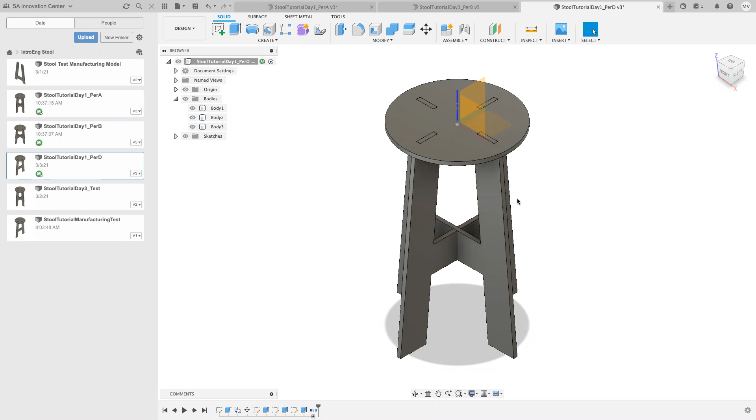All right, so here's our stool. Everybody has this designed. We have all of our dog bones at the corners. They're all in the right places. We're good to go. This is ready for manufacturing.

We're going to be CNCing this, and the way we designed it was with that manufacturing in mind. We call that DFM, design for manufacturing. So all of our parts are exactly the thickness of the plywood we're going to be using, and all of these parts have been set up so that we can literally use our CNC router to cut it out from one direction.

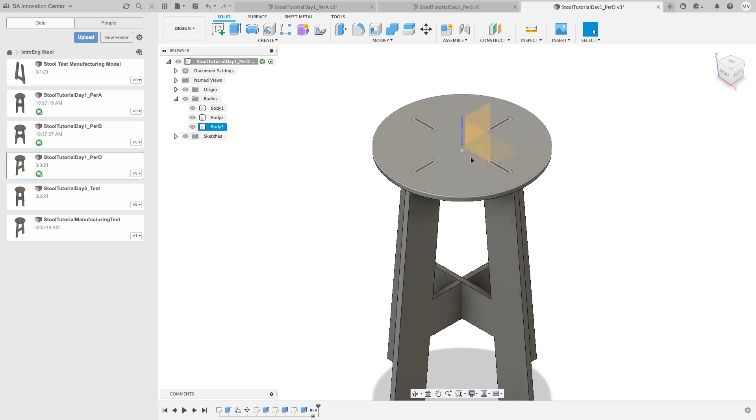We don't have any two-sided machining that we need, but what we do need is to be able to lay all these parts flat on top of the CNC. So as they are right now, the seat we could start cutting out straight from above, but we don't have a machine that could cut the legs from the side. So we need to do a whole setup, okay?

And it's actually called the setup. You'll see it in a second. And we're gonna do that in the manufacturing space. So instead of design, we're gonna go into manufacturing.

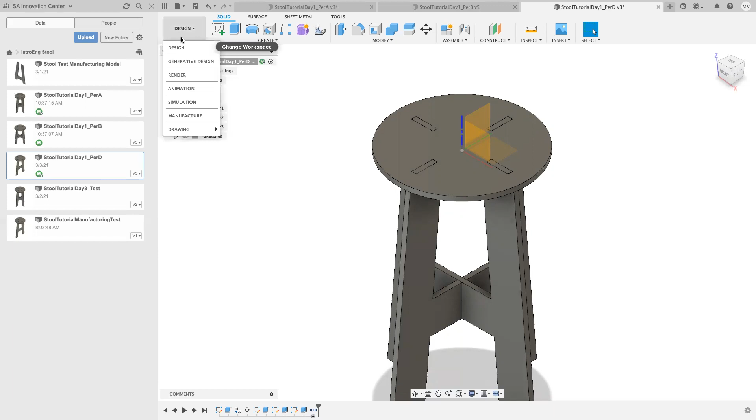It's gonna look like the stool hasn't changed. It's the exact same model that we had before, but all of our tools at the top of the screen have gone away. So now we have these new... let me try and get this out of our way so you guys can see.

Can I move this? There we go. So we have all these new tools along the top, all specifically to how we're gonna cut these parts out and how we're gonna make them.

All of the tools on the screen right now are for milling. Milling means that your cutting bit is spinning and either your cutting bit is moving past your material, your stock, and cutting it away, or there are milling machines where the cutting bit spins in one fixed place and you move your material past it. So you're either moving the cutting bit or moving the material, okay?

There are other options here. Turning is something else. Turning is when you spin your part and the tool sits still. So it's almost exactly the opposite of milling, okay? Turning, you might have heard of a thing called a lathe, right? A lathe spins our parts and we cut them. This is usually for circular parts, right? And so we're not gonna be doing any turning.

Additive, you know what that is. Additive is like our 3D printers. Instead of taking a whole block of material and cutting away to reveal what our part is, we start with nothing and we add on and add on and add on to build up to our part, okay? And then there's a whole bunch of other ones that I'm actually not super familiar with. But like I said, Fusion 360 has tons and tons of features beyond what we're gonna use it for.

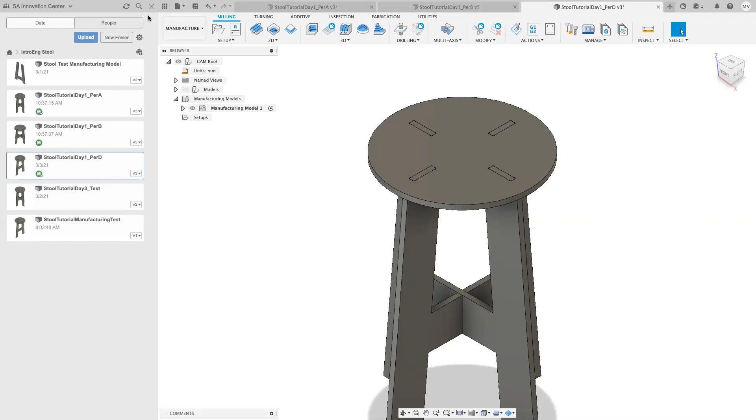And now inside of here, manufacturing model, we still have all of our stuff from our sketch, okay?

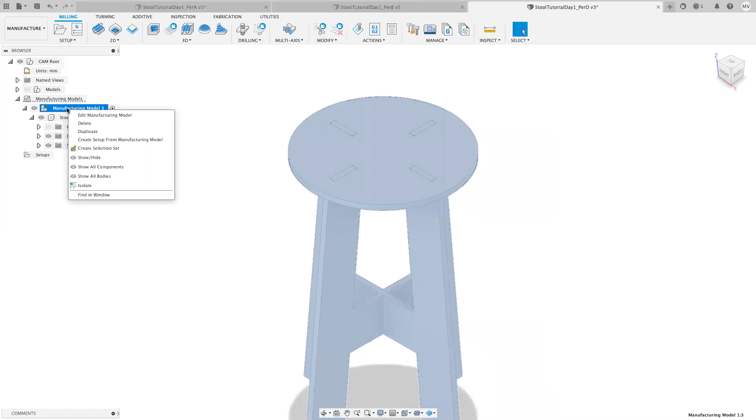Inside the manufacturing model, we need to edit this manufacturing model. We don't just want those parts sitting where they were, we want to edit them and move them around. So we're going to edit manufacturing model.

Now notice everything has changed in the top toolbar. We're still in our manufacturing space, but now we're in our familiar design tools. The first thing we're going to do is create a sketch that defines where we want to lay these things out. I want to put it on the XY plane. You have to make sure you click the XY plane. Some people didn't design their stool with Z being where the seat is, like the stool is kind of laying on its side. Make sure, even if you've done that, you click on the XY plane for this sketch, because that is the cutting surface of our CNC machine. It has its own coordinate system built in: X is left-right, Y is forward-back, and Z is towards the bed and away from the bed.

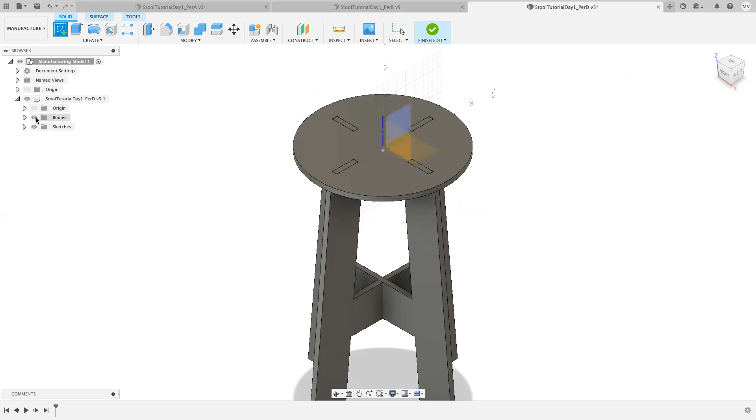So we're going to click on that, and right now I can't actually click on it. Every time I try and click on the XY plane, the seat is selected. So let me hide the body, and now I can actually click on the XY plane, and I'm going to define the area that I want to arrange these.

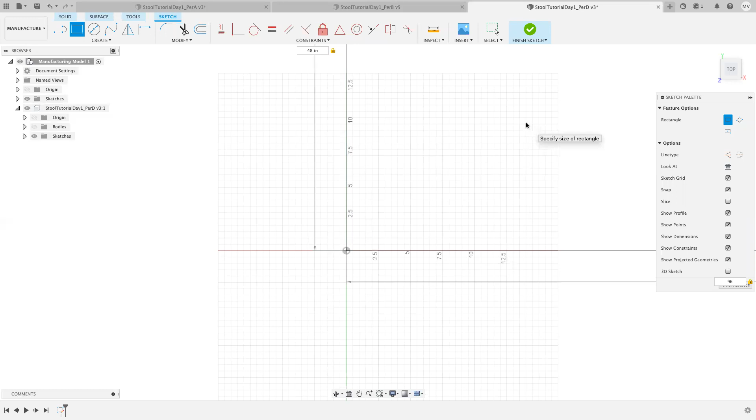For simplicity right now, I'm going to do an area of 4 feet, so 48 inches by 8 feet, 96 inches. That's the size of a sheet of plywood. Our machine can't fit an entire piece of plywood, it's only 2 feet by 3 feet, but there are machines that are this big. I'm doing a large space so you can see how multiple parts can be arranged next to each other.

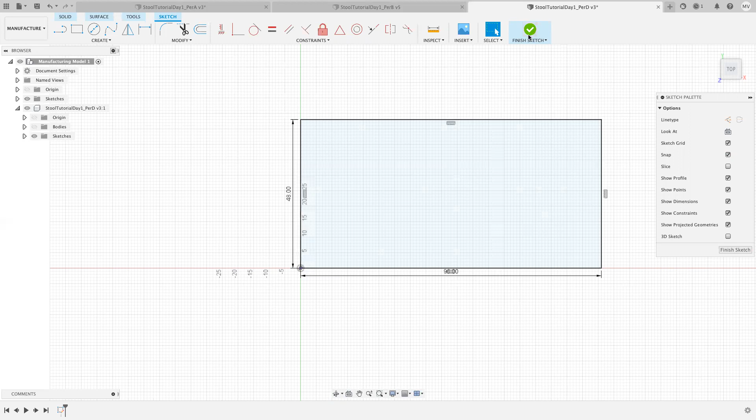That's it, that's all I need, and I can finish that sketch. I actually don't even need to extrude this to show the thickness of the plywood, I can just leave it as a flat sketch.

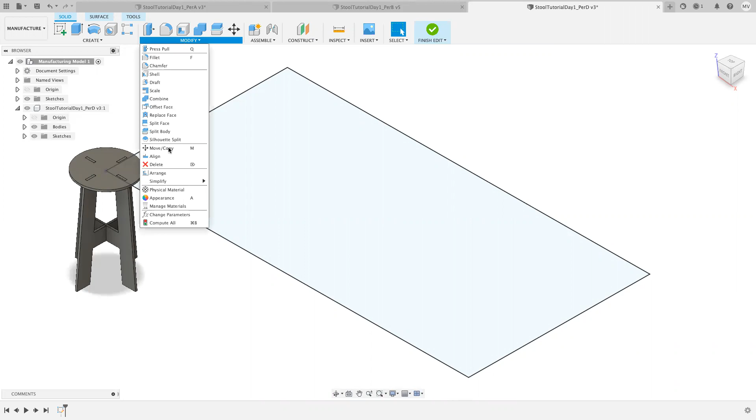If I bring my bodies back in, now all I want to do is put each part laying flat on this sketch. To do that, we go into Modify and click Arrange. We got this set of options, and I will first select the plane of that work area that I'm going to deal with. So there it is, one selected.

Mr. Varney, where's Modify? On the top toolbar, you see these icons, underneath it says Modify. This is where you have a whole bunch of additional features. So Modify, and then Arrange. Oh okay, thank you.

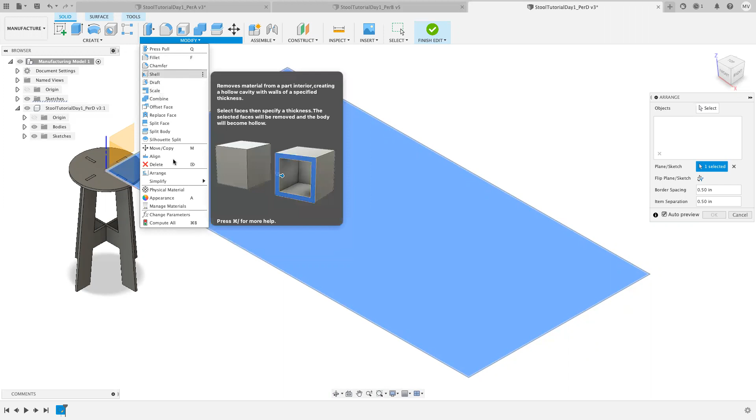Now we want to choose what objects we're going to lay out here. So let's start with the seat, there it is. And then it moved it. Now I want to pick one of the legs also. Wait a second, why did the seat move?

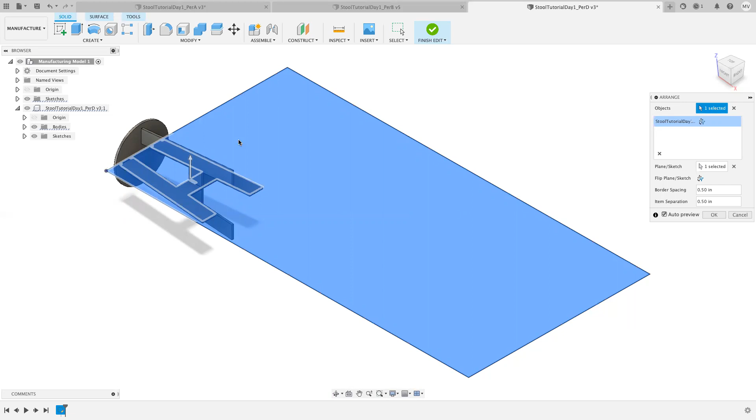It's all attached because when we originally did these designs, we defined the seat itself by a vertical sketch of the legs, and then we put another sketch perpendicular to that. So they're all intertwined right now, because they're still bodies. Let's cancel this, we don't actually want to do this yet. I hit cancel, it puts it back.

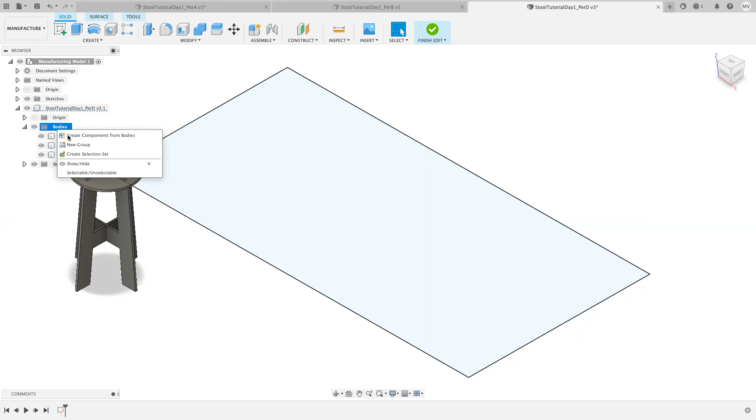I'm going to go to my bodies. I have 3 bodies in here. You can tell they're bodies because they're in the bodies folder, but also there's this little cylinder next to them. If I just right click on that bodies folder, I can say create components. Now notice the bodies folder is gone, and they're still called bodies because that's the name, I never renamed them, but they have this cube instead of a cylinder. That means these are components now.

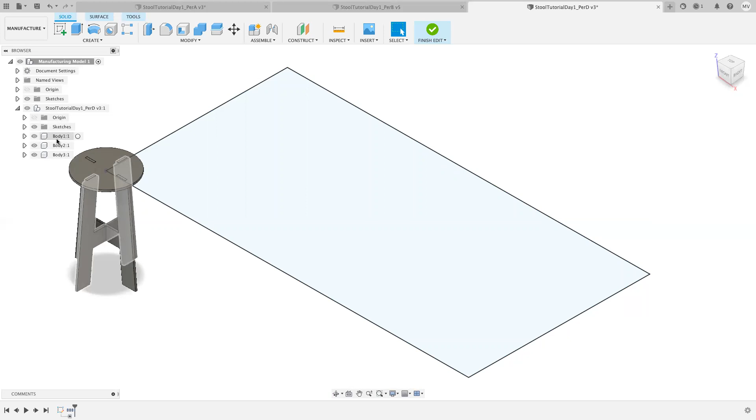They're finished, quote unquote, finished parts. They can be moved independent of one another. All that sketch information is back on our design page where we have the body still intact, but now these are components. If we go through Modify, Arrange again, and we select this plane, now we can select multiple components.

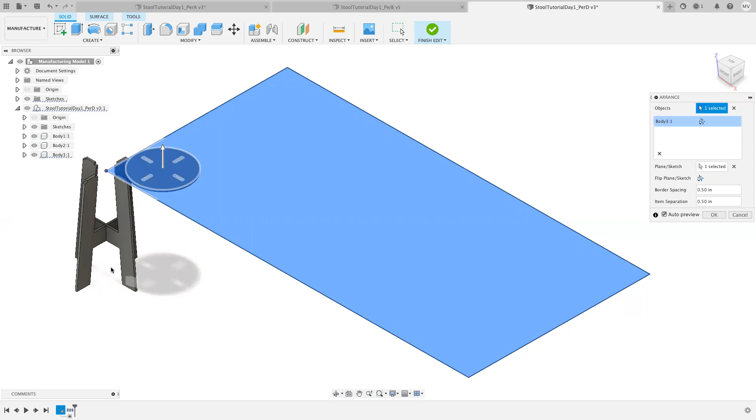So I'm going to click the seat, it will put the seat inside, and notice the legs don't go with it. I can click on one of the legs, it's going to place both of those there, and I'll click the last leg. It arranges all 3 of these things together.

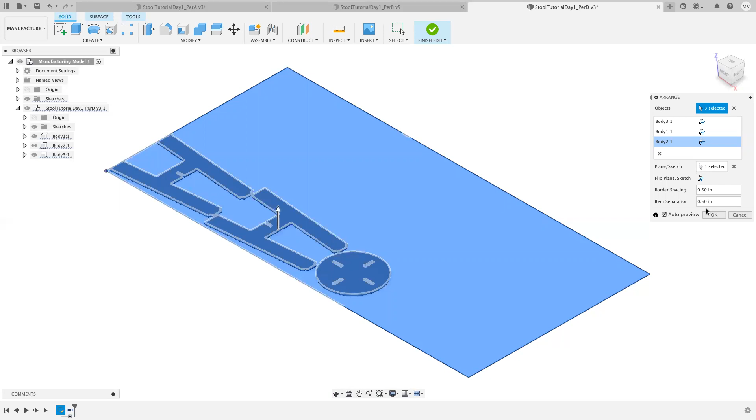They're all relatively spaced out nicely and put into the corner because we're going to try and conserve material and things like that. So one last thing we can check is our border spacing: how far away they'll be from the edge of that sheet of plywood and how much space is between them. I have a 1/2 inch between them because I know I'm going to be using a 1/4 inch cutting bit, about double that size. This way, as you're cutting around one, you don't cut into the other.

So that's it, we're ready to go. These are now laid out flat. But if I go back to my design space, my stool is still fully assembled.

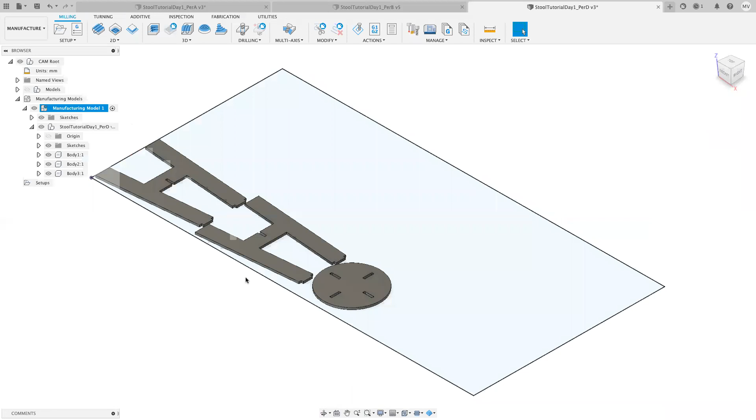Nothing changed. And I can always go back and edit things and change them over here. So let's go back to manufacture. We're all laid out. We're pretty much ready to start.

With our CNC process, we talked about tool paths the other day, and that's basically telling the machine which direction to go and how to cut. But we can't do that until we have what's called a setup. A setup is basically your raw material. Where is your raw material located? And what is the size of this raw material?

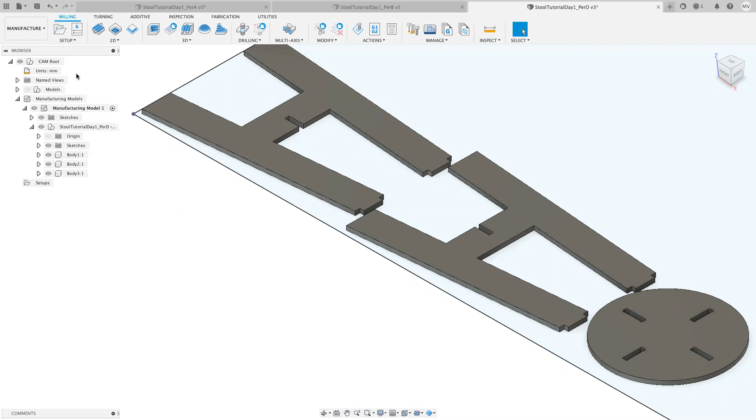So we need to create a new setup. So if I go to setup and then new setup, it kind of tries to define it on its own to start. So basically it's saying, all right, you need a piece of material that's big enough to fit all three of these in it.

Now, we might want to say, all right, let's make this actually the actual size of my 4x8 sheet of plywood. But remember what I told you, our machine can't fit all three of these. We'll have to cut each one individually.

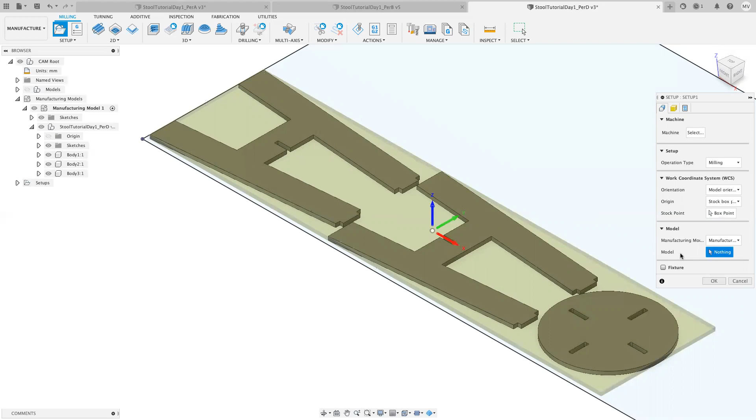So instead of model where it says nothing, it's weird that it says nothing to me. By default, it chooses everything. But I'm going to select something. Instead of nothing, I'm going to select one of these sets of legs. And so now we can see that yellow rectangular prism is defining that piece of material that we will be cutting out.

And we can go to our next, well, a few things. First, I always move my origin. We have to define where 0, 0 is for our machine and for this setup. I'm always going to put it in the bottom left corner. It doesn't have to be.

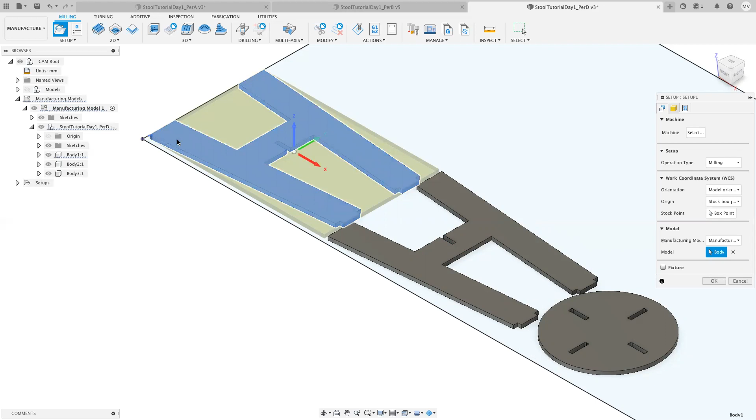But we go to this work coordinate system. We go to box point, and I always click that bottom left corner. This way, if I always do that on every sketch, I know when I go to set up my CNC machine, as long as I have enough room to the right and behind my cutting bit, we'll be in good shape, okay?

I need to tell it what type of stock I have. I always want to leave a little bit of material on the side. It doesn't have to be a small amount. We could have a bigger amount. I'm probably going to put a large piece of wood on here.

But if you put 0 for how much extra material is on the side, it won't think it needs to cut things like the bottom of the legs. Because if you say there's no material there, it'll be like, oh, it's just pressed against that side. I don't need to cut it. So you always want a little bit.

But I'm actually going to say no top material, no top offset. If there was a top offset, the program might think it needs to cut a layer off the top before it gets to the model that we want to come out of this. So we're basically saying no top offset, that our stock, our raw material is exactly the same thickness as the model itself, okay?

And so we're pretty much good. Everything is good to go. This is literally just defining our materials. I'm going to hit okay.

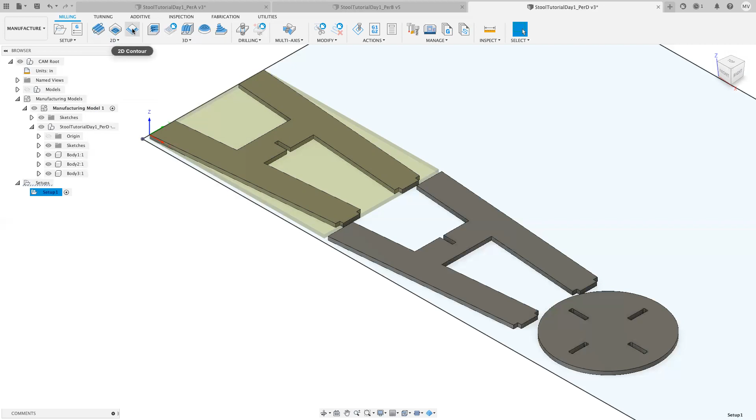The one we need is called 2D contour. It just means cut around my shape, that's all it means. So I'm going to click 2D contour, and then I need to tell it which shape I want to cut around. I'm going to say cut around the bottom edge of my model. You could click the top or the bottom, but I'm going to click the bottom.

Now we get this whole set of options here on the side. It's on the second tab right now because we're choosing geometry. I already selected the shape I want, so I'm going to go back to tools.

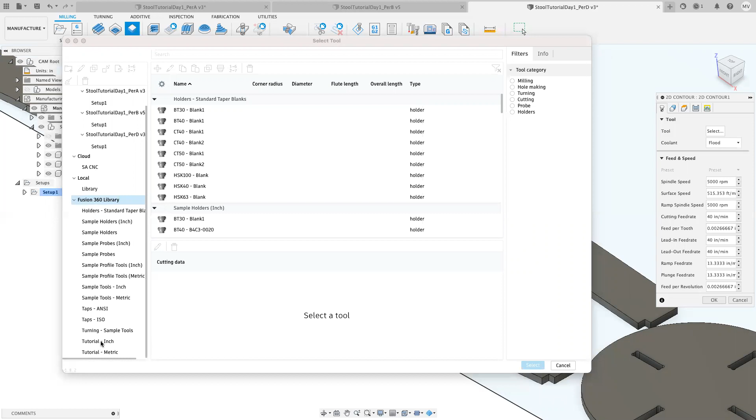Now we need to tell it what is our machine, what are we cutting with. When I go to tool select, I have some ones I've chosen recently, but you might need to go into the Fusion 360 library, where our cutting tools are in inches, and I'm going to go to tutorial inch. There's tons and tons of tools, but I'm looking for milling tools, flat end mills. You can use these filters to find things, and they have a few default flat end mills. We want our quarter inch one.

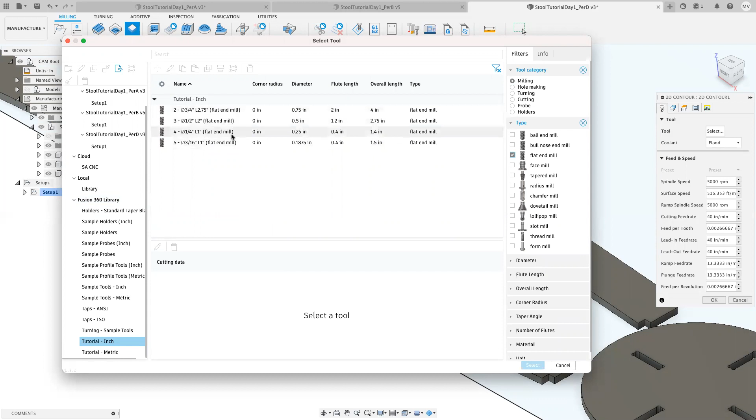So here it is, diameter 0.25, tool number 4 here, and I'm going to load that.

Now, I'm not sure if the first time you do this you'll have a tool holder. That's what this blue thing is, it's the thing that actually holds that end mill. If you don't, we'll find one, we'll get a default one. We can actually measure the tool holder that's on the machine and build it exactly the size and shape it is. The reason you'd want to do that is if you were doing some carving — imagine if you were trying to carve inside a deep pocket, you wouldn't want the thing holding your tool to run into your part. So it needs to know where the machine is so it doesn't crash.

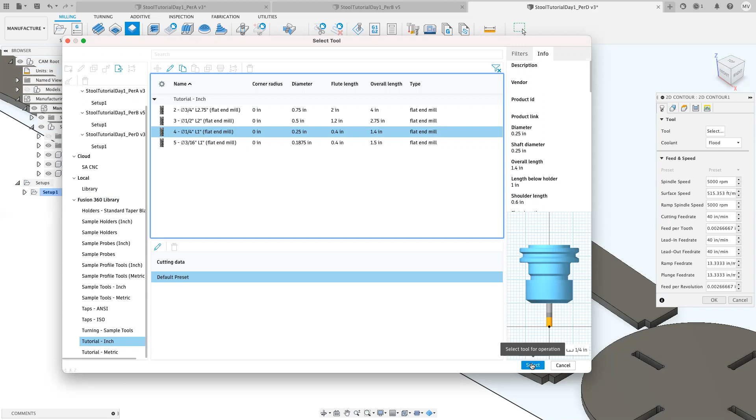And since we're doing a 2D contour, it's not super important. So I'm just going to choose that quarter inch end mill, select it, and if we go over here, we can see it in our picture now. So we're getting closer to finishing this manufacturing.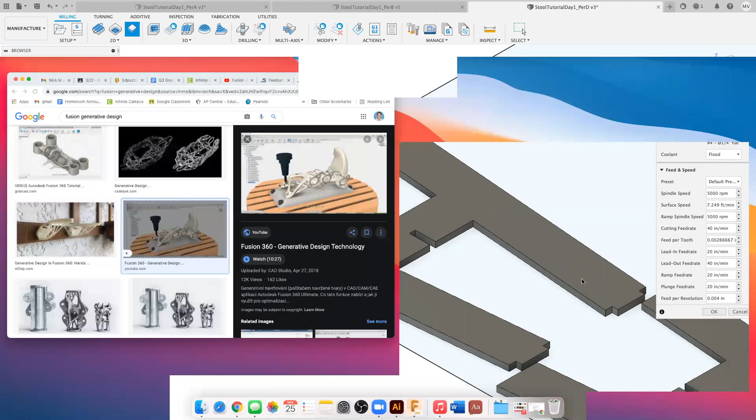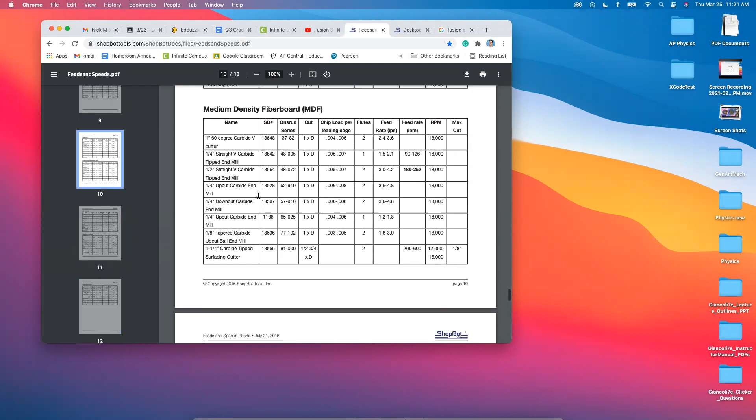Now, feeds and speeds — I'm going to tell you, we'll use defaults. There's a lot to this, but we can actually look up some defaults. Our machine's a ShopBot, and in their manual they have things like soft plywood, laminate plywood, or hardwood, so we can choose some numbers based on parameters they give us. I'm not getting into it, it gets real deep really quick, so let's skip those for now and just leave them as their defaults.

Geometry — so far this looks great. The only problem is, if you cut out a complete shape and remove it from the external piece of plywood that's screwed to the table, what's going to happen? Imagine if you cut out a circle — when you get to the end and finish cutting it out completely, it's no longer full. It won't fall through because it's sitting on something, but it's released from the plywood, and then it would kind of rattle around.

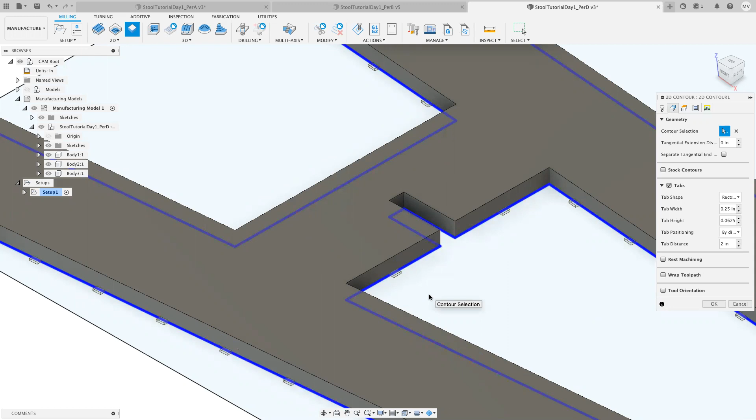So we need to do what's called tabs. If I just click that, you can see there are little rectangles of material that won't get cut — that's basically what it's doing, leaving it attached. There are way too many of them right now, because remember, if they're not cut, who has to cut them? You'll have to manually cut them, then sand them smooth and all that.

So we would change some of these, but let's just leave this to the defaults to see what this is going to look like. The tab height we have here is 0.06 of an inch, so it's really thin. That's usually enough that once you leave those tabs, you can literally break them off by hand.

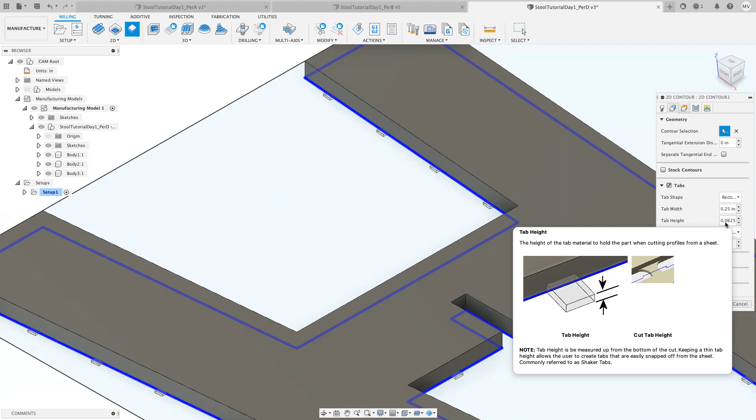So we got our tabs — this thing won't detach from the plywood and rattle around. We can think about heights now. Without getting into every detail of every type of height, when I hover over here it'll tell me what things are. Right now this is the clearance height, and it'll tell me the clearance height is the first height the tool rapids to.

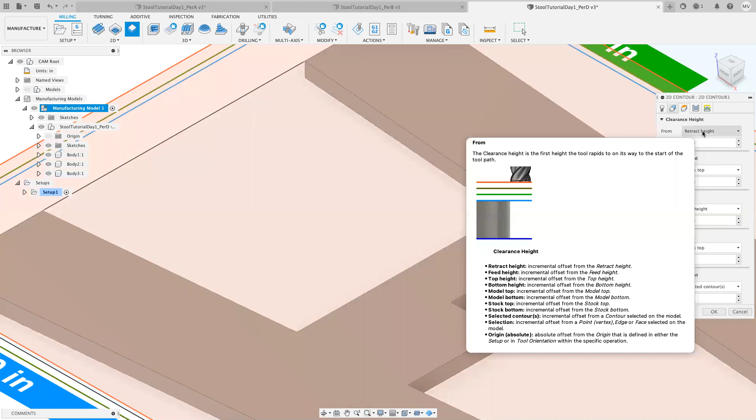Rapid is like high speed movement — there's something defined as rapid movement. And all of these things — retract height, feed height, top height — top height and bottom height are probably the most important. Our top height is basically the top of our model.

Okay, it's the top of our cut - when we expect to start cutting. Our bottom height is the deepest our cuts will go, and right now our bottom height is set to exactly the bottom selected contour. We selected the bottom of our model - that's where we're going to cut to.

The problem is if you leave it exactly there, there's a chance you're just a teeny tiny bit off, and you might leave a thin piece of material uncut. So I want to go below the bottom of my model, a little bit through it, so I know it's completely cut through. I'm going to make this negative 0.05, and now I know I'm cutting through the bottom of that material.

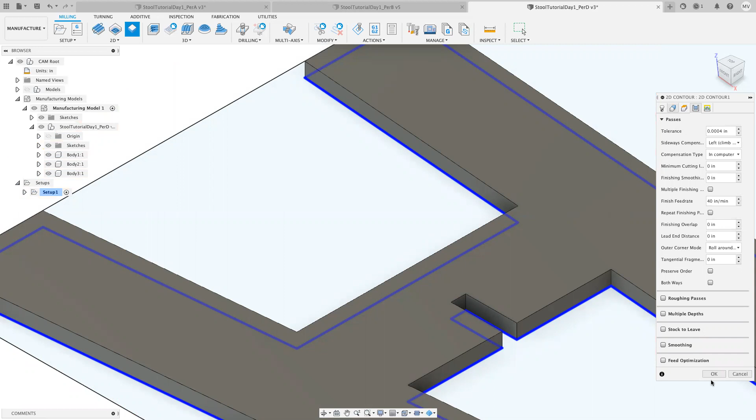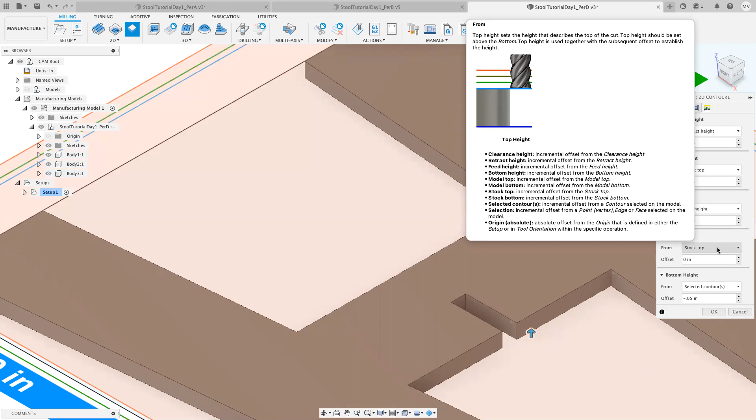Then we can go to things like passes. Let me go back to our heights - for top height, I set stock top. Remember, I already defined the stock top as exactly the height of the model, with the offset set to 0. So that yellow box is exactly the same thickness as my model, which means the stock top is the model height. I've already locked them exactly on top.

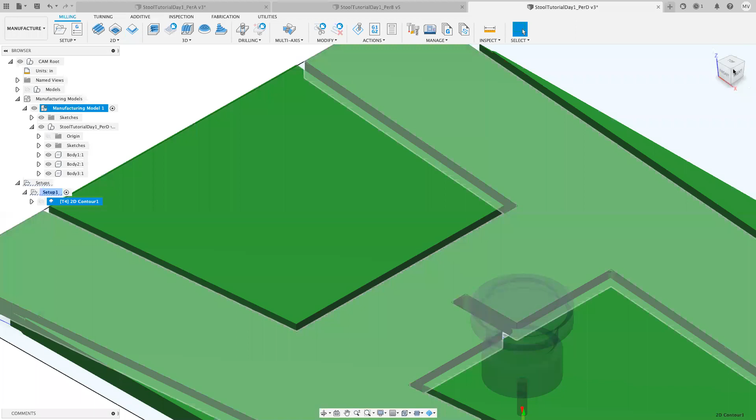So, all finished - I'm going to say done for now. Sometimes I'll finish this so I can see it before going into any settings. If I look, they're showing me the material - the green is the material, and I can see where it's cut through. If I angle it, you can see the tabs that are there. This looks pretty good.

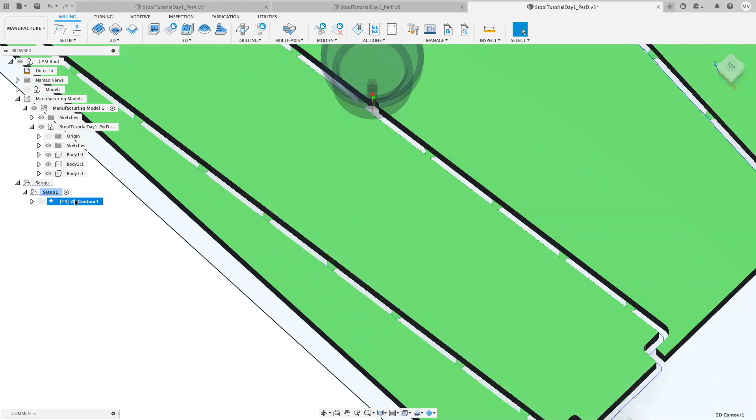I can actually simulate this - let's click on it. If I right click, I get my options and can say simulate. If I zoom out, I can play this and slow it down or speed it up. Okay, and it looks good.

The only problem is that I'm basically cutting all the way through in one single step. I don't really love that. The diameter of the bit is 0.25. Usually you don't want to cut deeper than the diameter of the bit in a single pass. Now, there are ways around that - you can go deeper and cut slower and change feeds and speeds, but as a rule of thumb, the diameter of your bit should be your maximum depth.

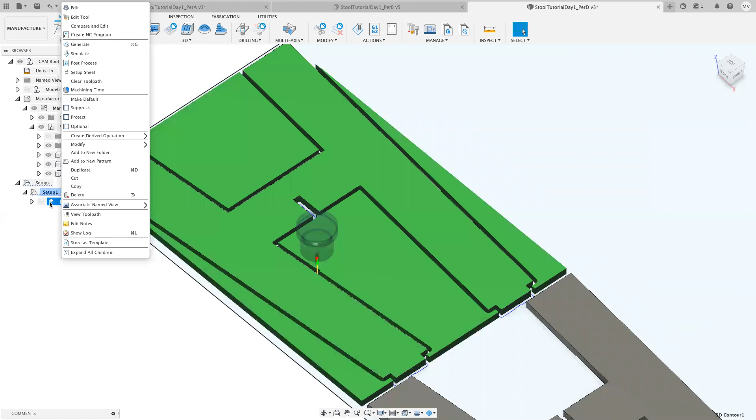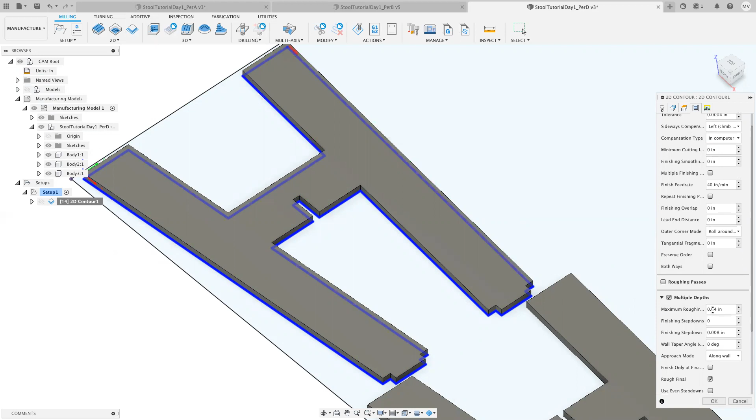So I'm going to close the simulation, go back to this toolpath, and edit it. For passes, I'm going to set this to multiple depths. Now, the maximum roughing depth - roughing just means we don't care about the finish, we don't care what it looks like. Sometimes you'll do a finishing pass, which takes off a tiny thin layer and goes nice and slow to make it look beautiful. That's usually more important for things like metal - for plywood, it's not so important. So I'm going to do all of these cuts in roughing passes.

I allowed it to rough the final, meaning once you go to the very bottom of the hole, you can still be doing all the rough cut settings. I'm going to set maximum cutting depth instead of 0.04 - that's really small - to 0.2. It's not the full diameter; full diameter is 0.25, so a little bit less. I think we're safe. Okay, I'm going to hit OK.

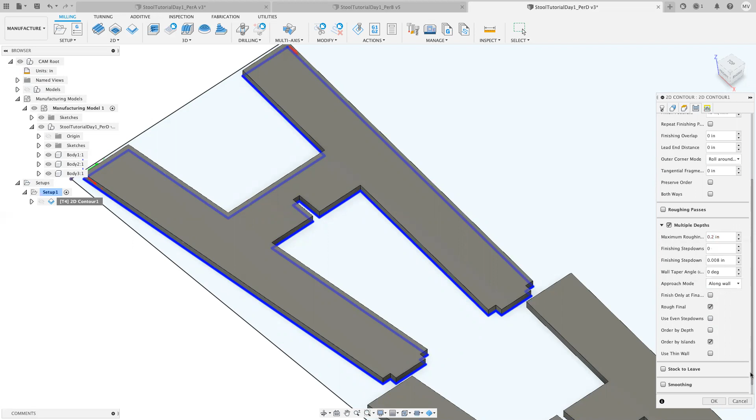And now when I zoom in here, you can see there's multiple - maybe in here you can see it - multiple blue lines. Each one of those blue lines is a pass with the tool.

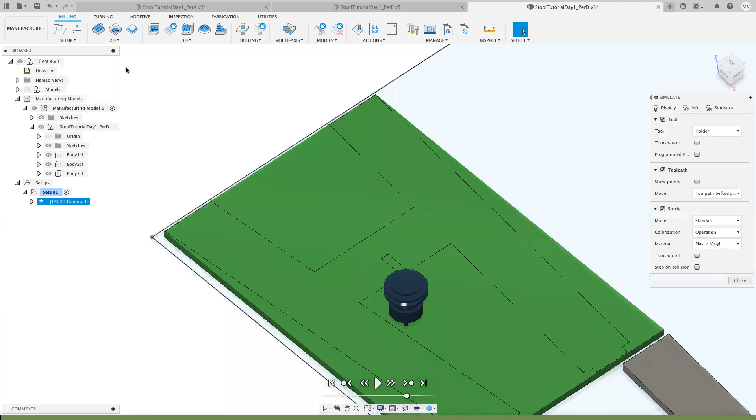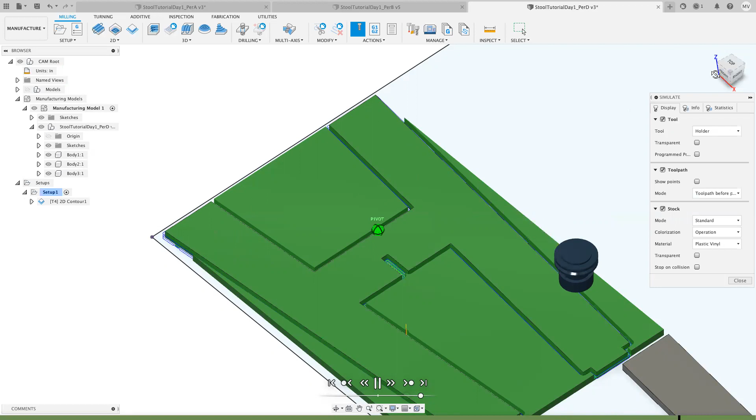So if I simulate this now, click on it, say simulate, and press play, we get to watch it. I'm going to crank up the speed - this little slider will make it go faster. Now it's passed around already two times, and now we're going our third time, cutting all the way through the material. So it cuts all the way through on its last pass, showing the tabs - everything looks good.

So the last thing we need to talk about - I'm happy with that. This is basically ready to go to the machine as long as we know our feeds and speeds are tuned in properly. Then we need to do post-processing, which is generating the G code for our specific machine. Because every machine, from different manufacturers, expects the code to have different formats, we have to make sure we choose the correct post-processor.